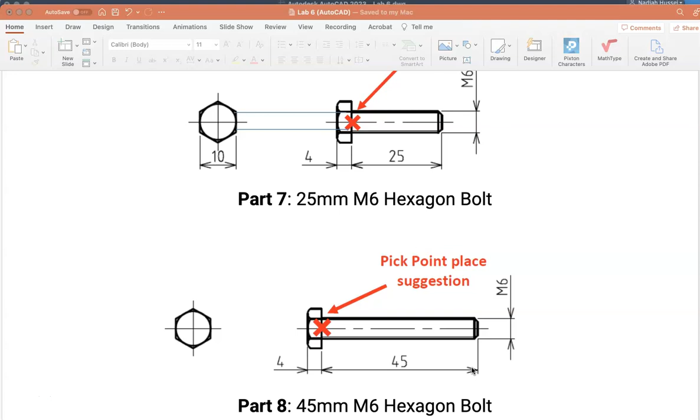Previously we did part 7, which is a 25mm M6 hexagon bolt. I expect you to be able to do the 45mm M6 hexagon bolt. Basically it's the same thing except the length is now 45.

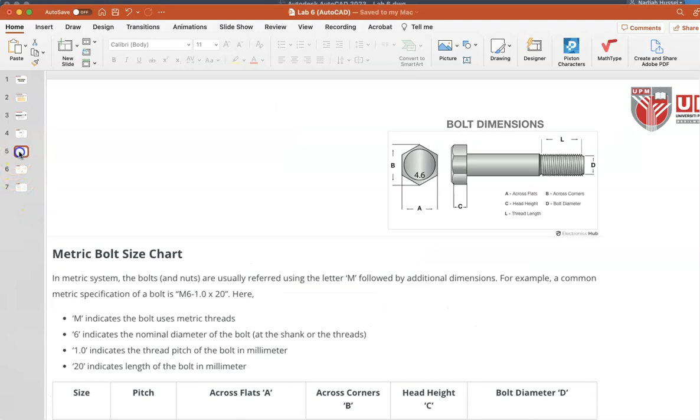Moving on to the next part, which I can't really see. Okay, so this is the bolt dimension that we discussed earlier.

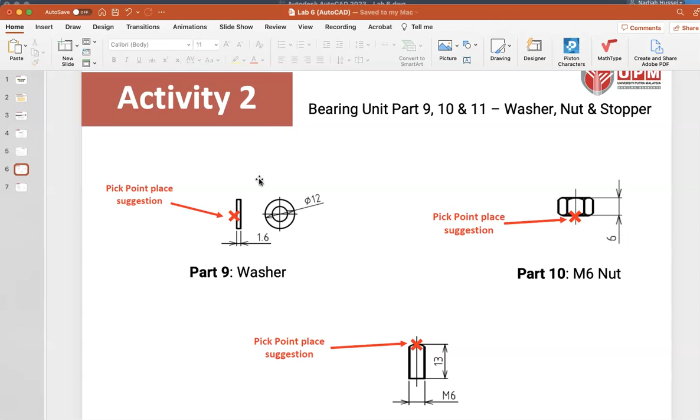So this is activity 2, which is bearing unit part 9, 10, and 11 — the washer, nut, and stopper. What is the relation of these parts to part 7 and 8 that we did earlier? These washers and this M6 nut will obviously be used together with the hexagonal bolt, which means that this washer hole should be wide enough to fit the M6 hexagonal bolt.

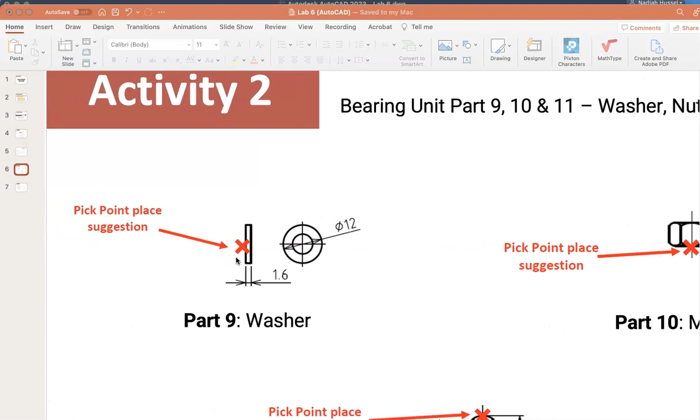Alright, let's discuss the dimensions of the washer. Here they are telling us pick point place suggestion is here, and telling us to divide this into 2 and then mirror it. For me, I do not want to do that because this is fairly simple. We don't have to mirror stuff, it's just several steps to complete this.

So here we can see that the washer has a thickness of 1.6 millimeters. This is the thickness. We are viewing this sideways, and from the front we can see that the diameter of the washer is 12, which means the radius is 6. For the inside hole, the diameter should be 6, because we want to be able to use this washer with the hexagonal bolt.

We can see lines that indicate this is a circle, because this is a center line. But in this case we cannot see the dashed part because it's extremely small. Okay, so let's do this — it's very simple. This would be 12 and this would be 1.6.

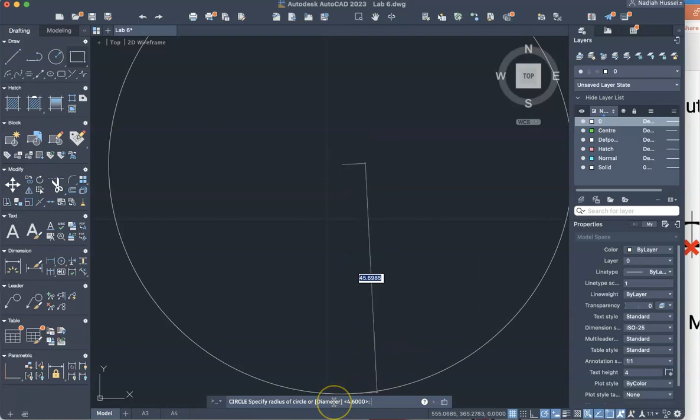I'm going to do this above part 7, making my washer, the front side first. The first circle I'm going to make will have a diameter of 6. But how do I specify a diameter? Looking at my command bar, it tells me if I want to specify the diameter, I should type capital D. Then I'm able to specify the diameter to be 6.

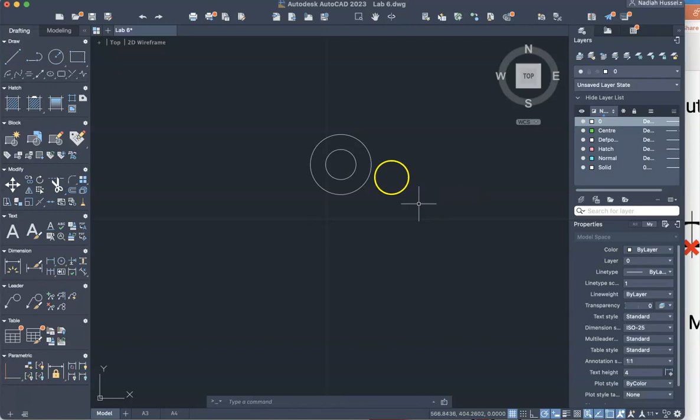My next circle I want to follow the same center, and now my diameter would be 12. Okay, so that is my washer done. Then I'm going to label the dimension like so.

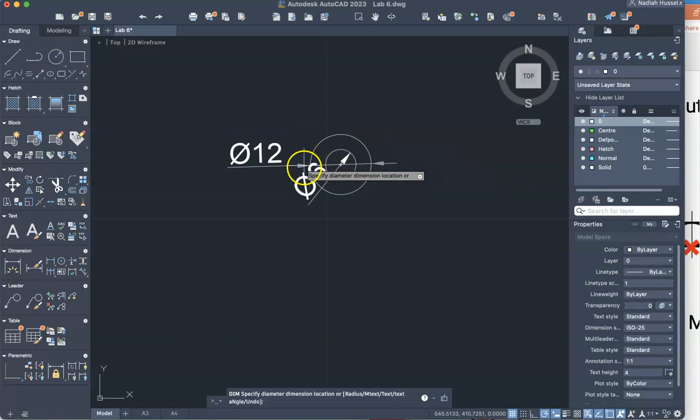And then again, I'm going to measure... this does not look pretty. Let me try to make it like so. Not great, let's make it like that. Okay, never mind, I'm going to do that at a later time.

So the next thing is obviously the washer sideways. I want to have a guideline for this, using my center layer. I'm going to make my first guideline for my center. Why is it not snapping? My snap should be nearest.

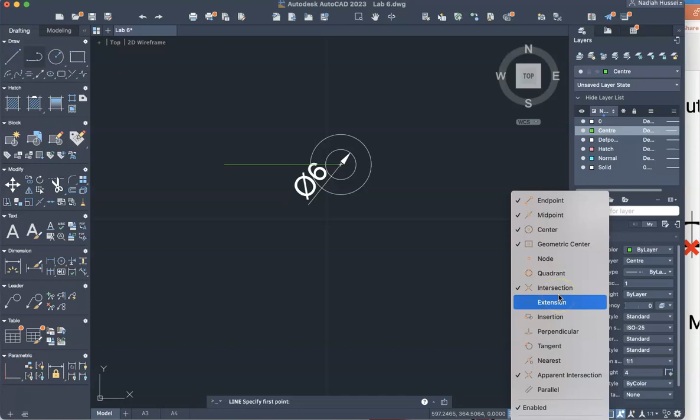Let's try that, and make sure I'm in ortho mode. I need this to be straight, that's why I need it to be in ortho mode. Does it really matter? As long as you have a normal line. Hopefully that is normal.

Next is to make the rectangle, but my rectangle always fails. Let's see if I can try it this time. I'm going to go into my default layer, change the layer, and this should be 90 degrees. Then this should be 1.6, and I'm just going to intersect with my guidelines.

Then I'm going to remove this guideline because I don't need it, and remove this guide too. I don't really need to remove this, but I can make this my center line. Then I'm going to lengthen it by 3, as mentioned earlier.

Oops, it's not working. Select, and then I'm going to lengthen it like so. It's not working. Wait, okay let me try again — 3, and then over here 3. Control C.

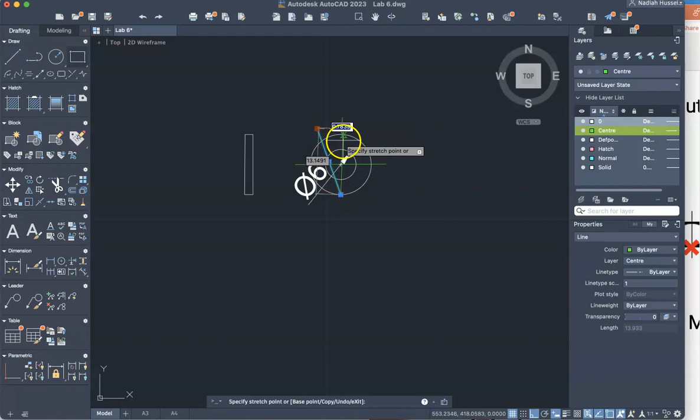Okay, another line, or I can just copy this line and rotate it, but it's not going to work. Oh, this is not good. Let me try again. I'm going to delete this because this did not work, and I'm going to intersect my circle.

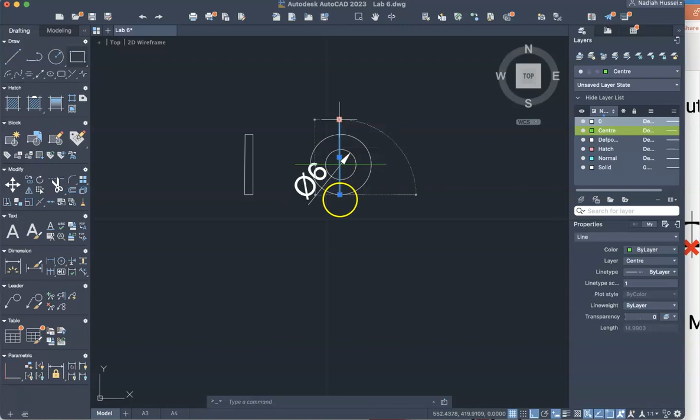This should be in the center line, so I'm going to move it to center. It's going to change its appearance, going to wear a green dress. I don't know, maybe baju kurung, dress is also fine. So that is my washer, label the dimensions and place it in your title block for part number 9.

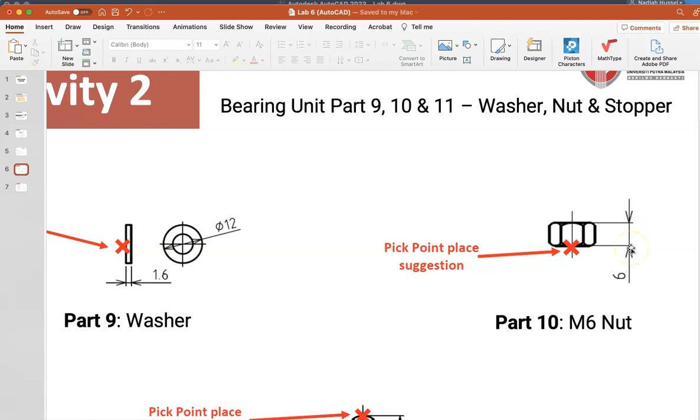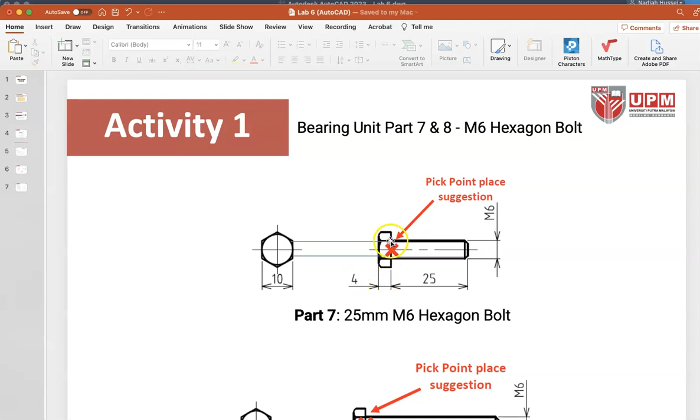So now the next one is going to be part 10, which is an M6 nut. The M6 nut has a dimension of 6, and I believe this is just the same as this guy, except that now instead of 4 it is a 6 and both sides are rounded.

Okay, so I've copied it. I don't know why it looks like that. Now what I want to do is remove this line or trim it. You can trim it or remove it or delete it, either way doesn't really matter how you do it. Okay, right, so now I am left with this.

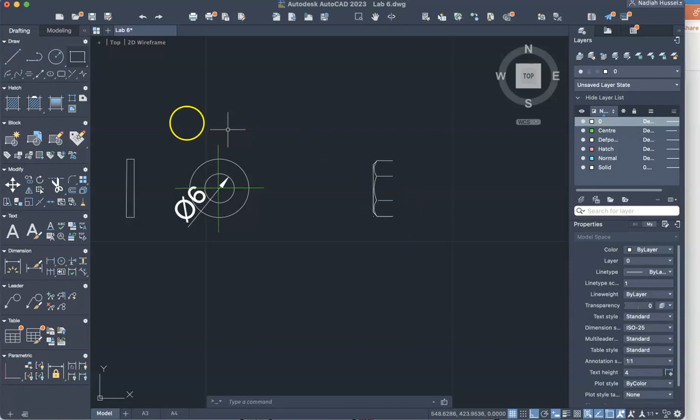Let me try. Delete. Okay, so from this edge to this edge it should be 6, right? So I want to snap on that, make sure this is 6. Okay, so it's just this much, and then I am going to mirror.

Wait, I need to make a line first. So a line to guide myself to find the midpoint of this guy. Okay, then I'm going to lengthen it. This is basically my mirror axis.

Okay, and then I'm going to select mirror, and I'm going only to select this side. Enter, and I'm going to mirror it like so, and going to extend this line until it intersects the mirrored parts. Now obviously this is not connected, so connect that.

Okay, so now I remove this because it's not part of the diagram. Now I am going to rotate it like so. There is, oh, so it didn't work again. Going to remove this.

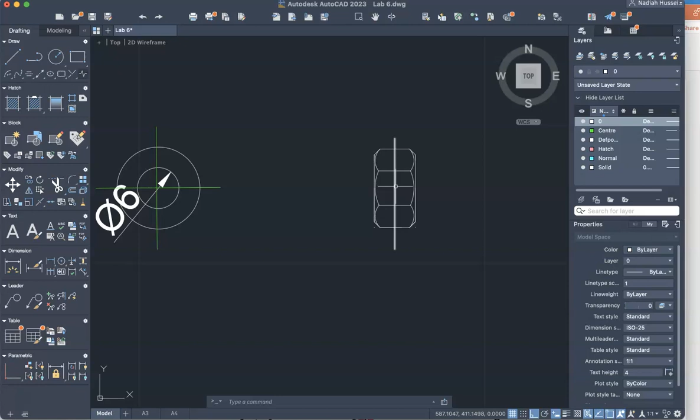Okay, so I'm going to rotate. Can I specify the angle? So enter, specify base point, and then rotation angle would be 90 degrees. Okay, so that is my hexagon nut.

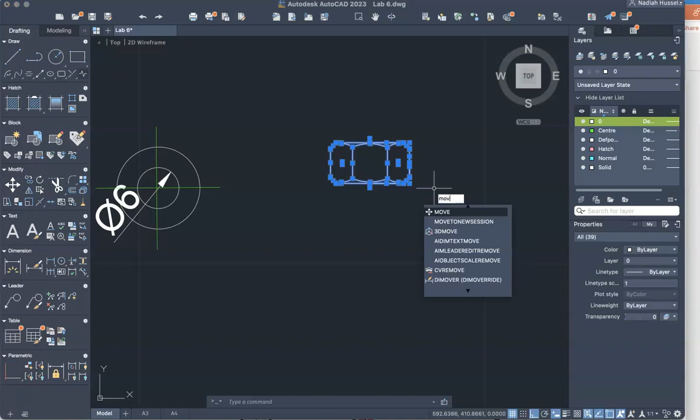So I'm going to move it so that it looks presentable. Why is it not moving properly? Okay, so I think that is okay. So there you have it, your part number 10.

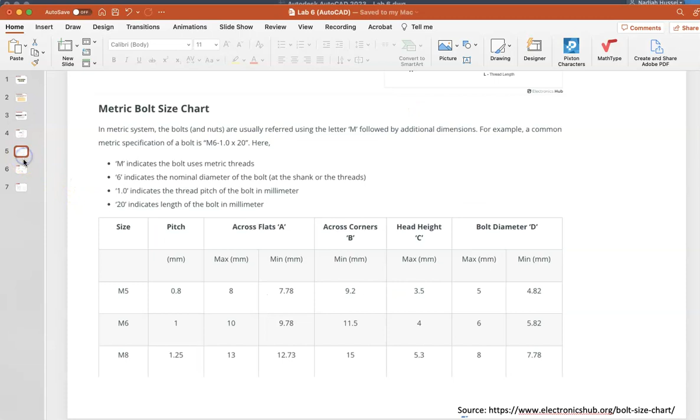Okay, next one, we're almost done. Not really, we have another part, which is part 12 and 11. Okay, so this is an M6 stopper bolt. As you can see here, the diameter or the size here is 6. This is 13, and then you have a fillet going on, or an arc.

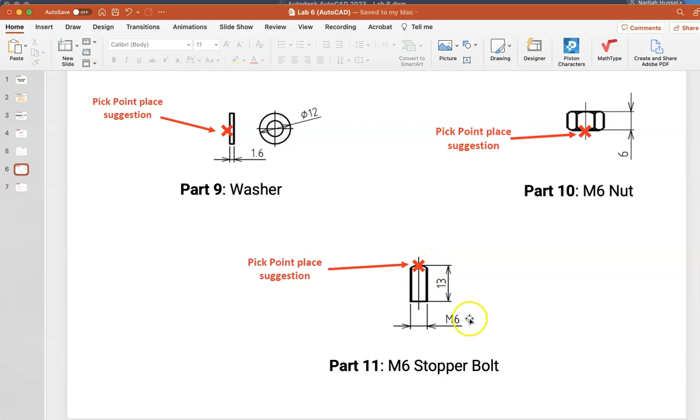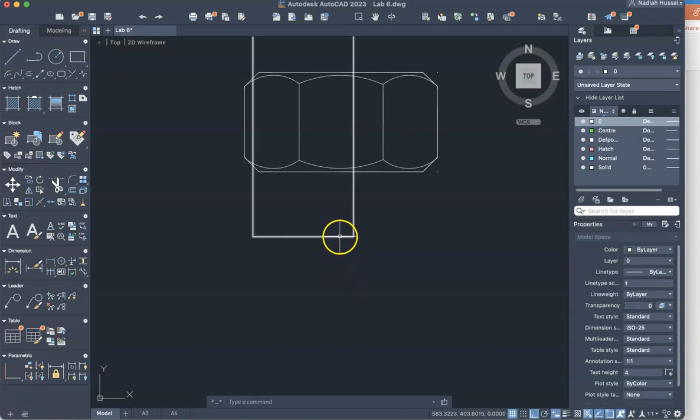Let's make our rectangle first, so that was going to be 6. And the other side was 13. So now this is like way too big. Is this really 6 by, I don't know actually. Okay, let's see, let's measure it because I don't know if this is correct.

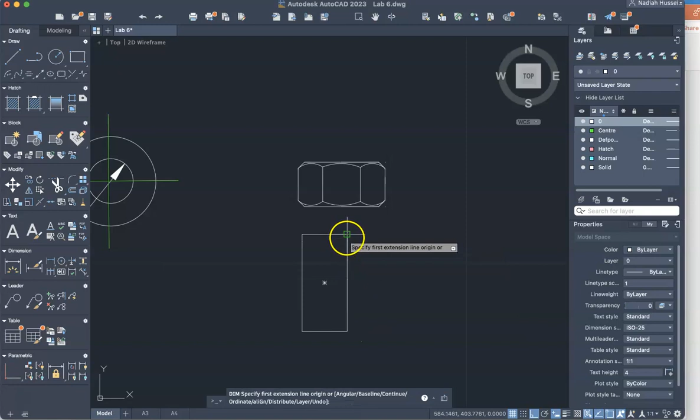Oh, it's not working. Dim. Okay, so this is correct, it's 13. Now I want to do my fillet.

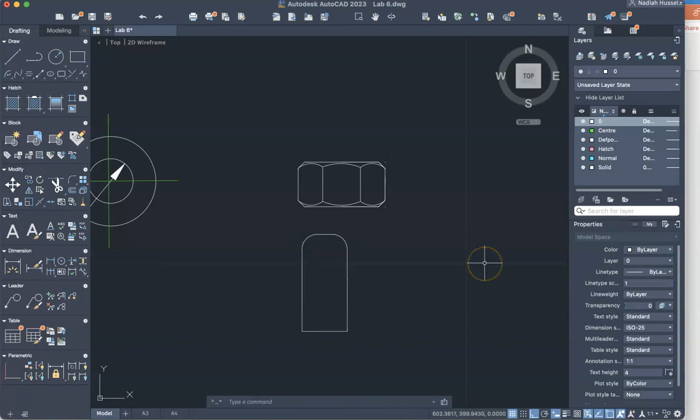So for part 9, 10, and 11, you can combine into one title block because they are very small. So my radius right now is 1, let's make it 2. And then for the other side. Okay, so that is your part number 11.

Now going on to part number 12, which is this guy over here. Okay, so this guy needs to be on its own, needs to have its own title block because it's obviously big. So I'm gonna see you in the next part, okay?